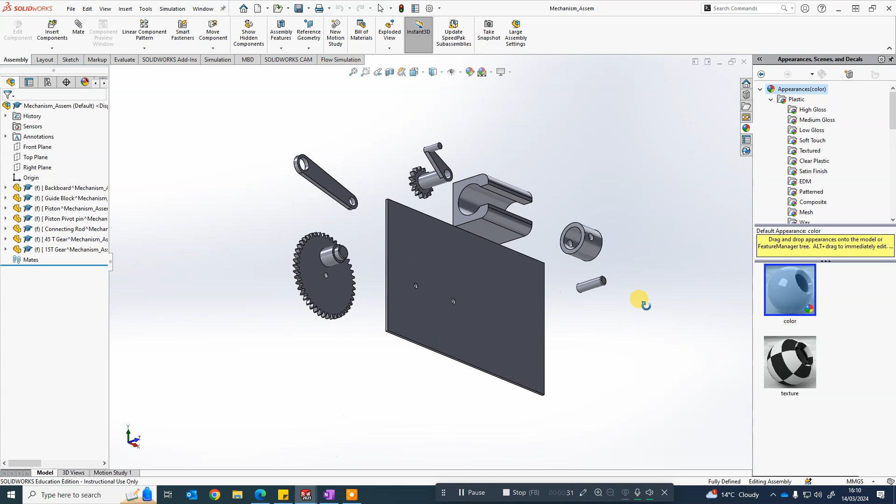So you are going to be assembling this random selection of parts that I've pre-made for you. You'll be modifying some of them as well, and you'll be following a tutorial in order to do that. But the end goal is for you to produce, I'll show you the solution already, this here. You'll notice to prove you did it, I've made you modify the backboard, put your name on it, round the corners, and change the colors.

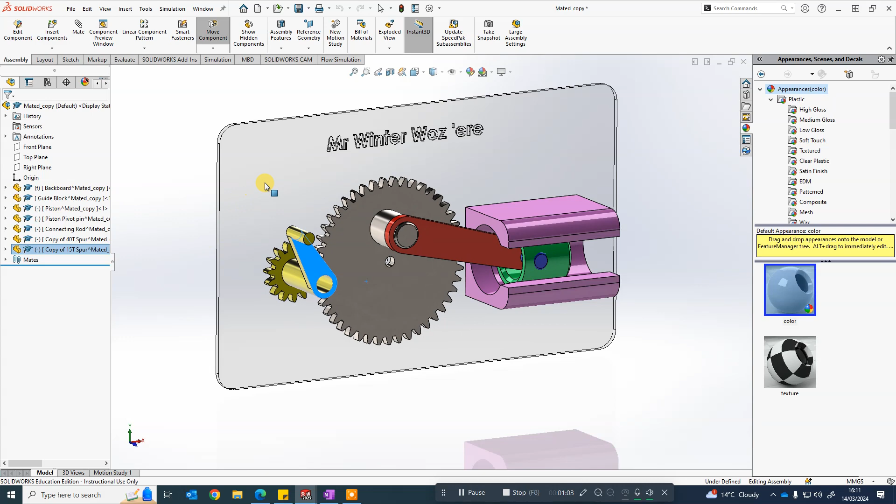But this is where SolidWorks is really cool. You can actually create full-on simulations. So I've made a gear box that drives a crank and slider mechanism that moves a piston back and forth. And I can wind it backwards, and I can interact with this just like I would a real object. So if I push and pull the piston, it moves. That's what you're building up to, and that's what you've got to achieve by the end of this.

Now, very, very important you pay close attention to every step here. There will be places where it's very easy to mess it up if you miss a key instruction. Equally, if something goes wrong and things don't go together as they do in my video, then rewind and watch what I did, and also potentially go back and undo and delete any parts or any mates or constraints that you got wrong.

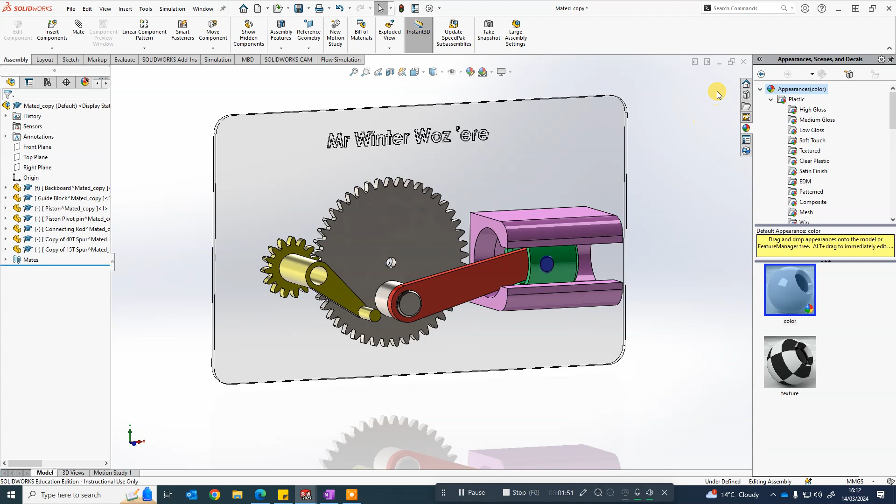Okay, right, in order to begin, you'll go to your OneNote page and your teacher will point you to where this is, but there should be a file for this on the OneNote. Now you can't just open it from here for some reason, OneNote blocks it, so you need to right click, Save As, and then go and save that file in your OneDrive.

Now you should have already signed into OneDrive, remember? So if you haven't signed into OneDrive, come down here, make sure you've clicked on the cloud and that it's signed in. Mine's got a sync issue, but it is at least signed in. And make sure you're on your OneDrive and saving your mechanism assembly here, okay?

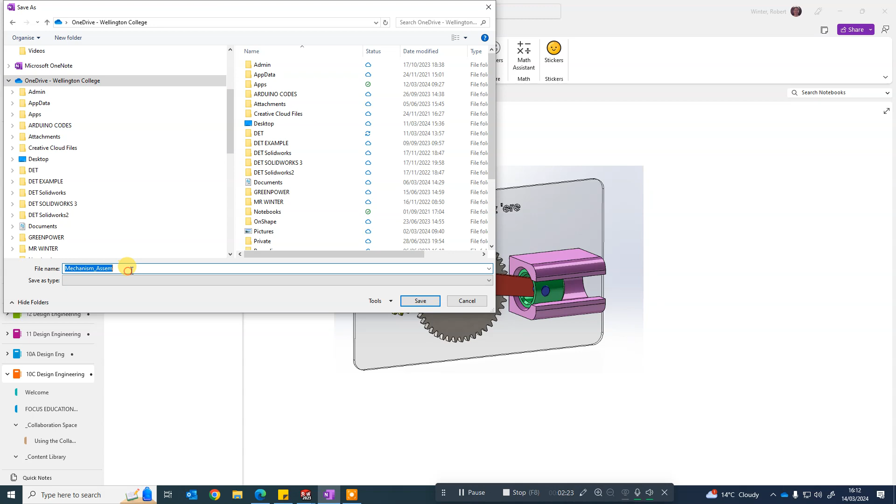I'm going to save this in my OneDrive in DET, and I'm going to call it mechanism assembly. I'm going to call it version 1, just because, you know what, if you make a mistake, do it again. Okay, let's go and open that now.

So I'm just going to close these two down. So file open, and I put it in my OneDrive, DET, mechanism assemb. Now, fingers crossed this works. Here we go. Okay, right.

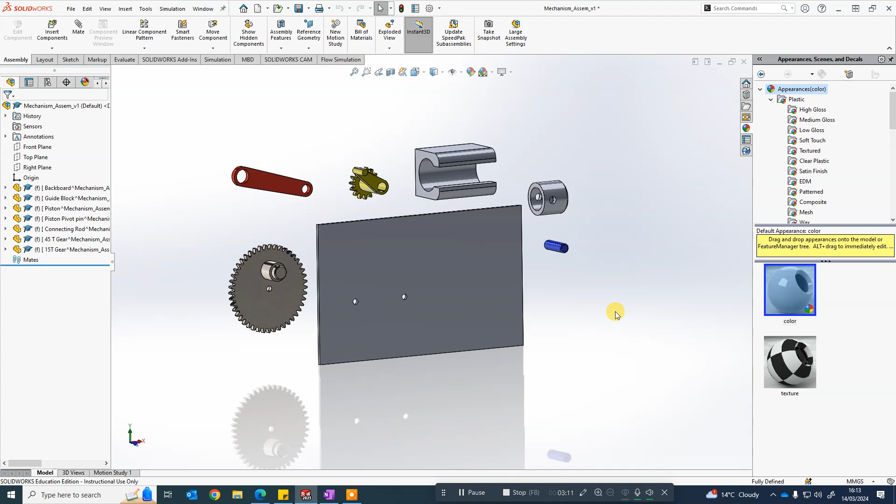So just to remind you, because you're going to need to be navigating your view if you don't know how to do that, it's pretty much done with the middle mouse button. If I click and hold the middle mouse button, I can orbit around. I can zoom in and out by scrolling my wheel. And if I hold control on the keyboard and the middle mouse button, you can see I can drag my view left and right. So just remind yourself how to do that, because in 3D assemblies, we'll be looking all over the place to pick the relevant parts that we need to join together.

Okay, at the moment, if you click and drag or try to drag any of these things, you'll notice you can't do anything with them, right? They stay put. This is the first concept I'm going to introduce. These are all fixed in space at the moment.

And you can tell that because they have this little F symbol next to them. Now, I want you to make everything except the backboard, this grey thing, unfixed.

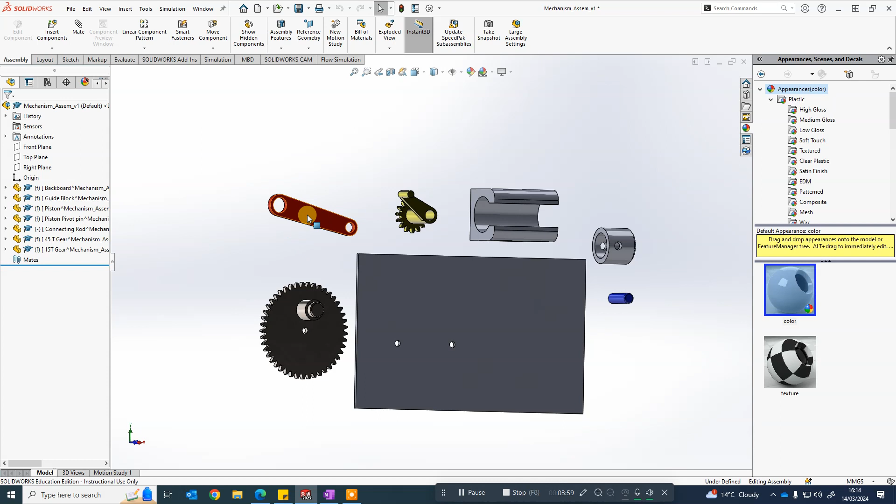We do that by right-clicking on them and choosing float. You'll notice when float is selected, the little F disappears and I can now drag it around. It's very important if you're trying to join 3D things together that you make them float initially, because otherwise they can't move from their location and it will throw up an error. You'll tell it to go and stick to something else and it will go, nope, some random error that I don't understand. Well, you won't understand, but it won't do it because you've left it stuck in space.

So that needs to be floated and that needs to be floated. Right, just check they all move. All good, good, good. Now, I've deliberately designed this to teach you about a whole bunch of different constraints, okay?

Now I keep calling them constraints. I should probably call them mates, because the tool we're using is up here. It's called mate. It's under the assembly tab, so make sure you're on assembly, and it's called mate. Now, if you click it, you'll get this sort of window appear here.

It's a semi-intelligent tool. You don't actually have to choose your mate first. It generally figures it out for you. We're going to start simple. We're going to start by attaching this little gear to the backboard.

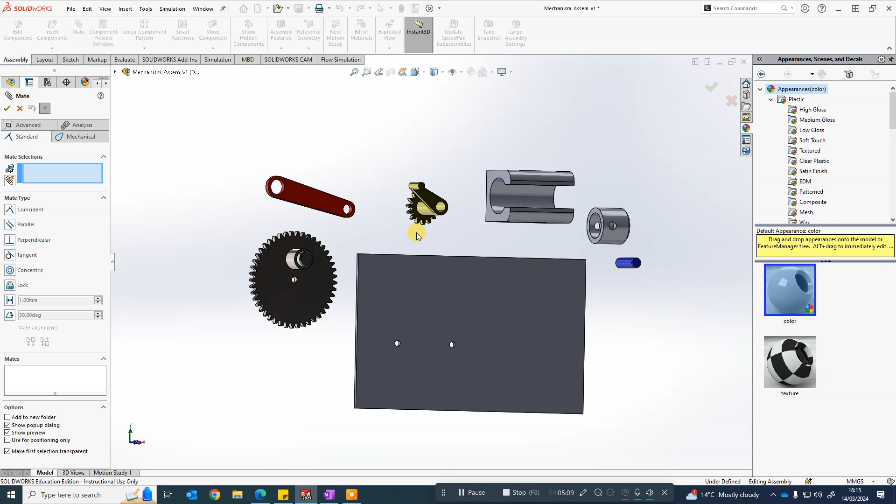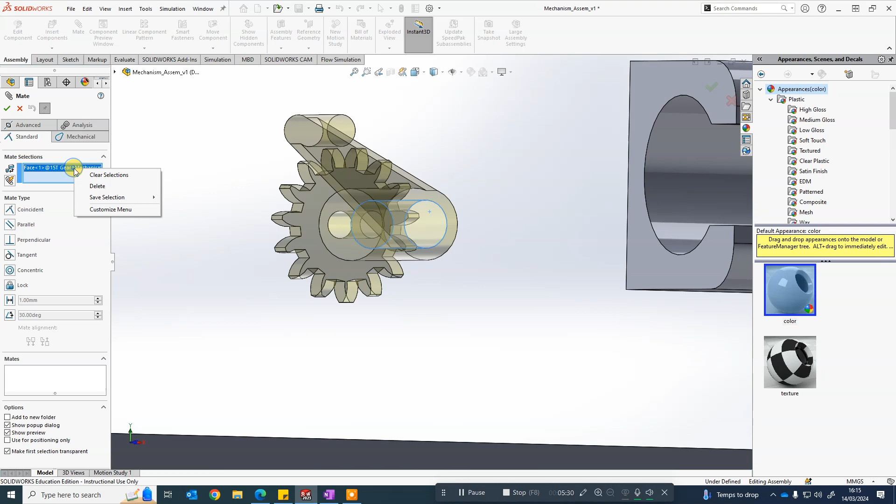So what I'd like you to do, just zoom in, don't click anything, and choose this inside cylinder, not the edge, the cylinder, okay? If I click it, just before we do anything else, do you notice it appears over here? Look, that's telling us what we've selected. If you misclicked, you can always right click over here and either clear everything or delete the one you clicked.

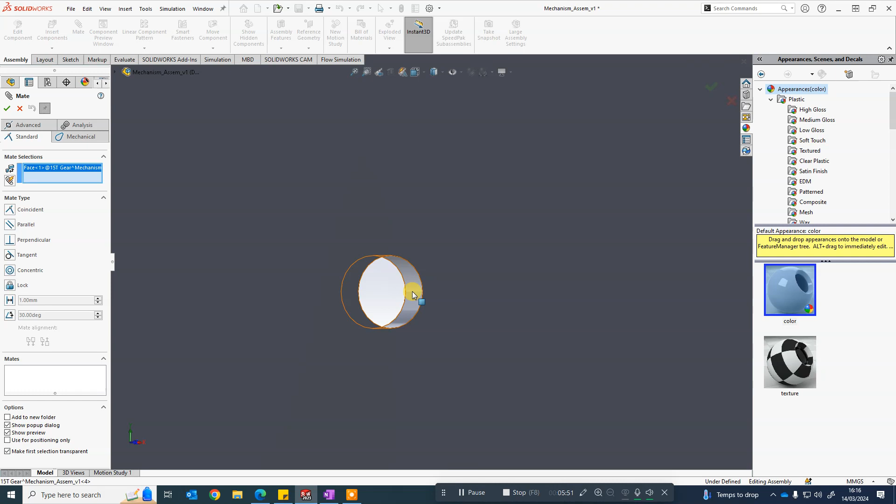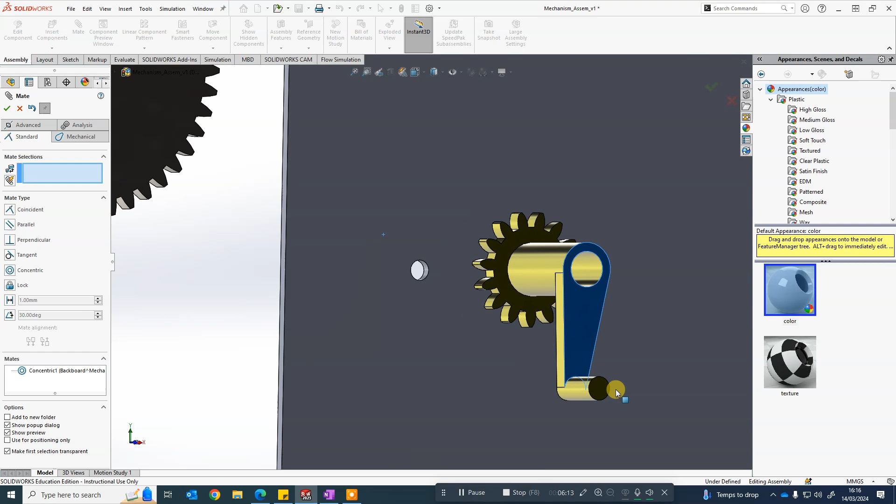Now, just do me a favor and just click and drag at the same time the gear. You'll notice the gear is fixed to the axis, but it can still pass through it. Okay, so drag it out of the way, zoom out, and bring your view around a bit.

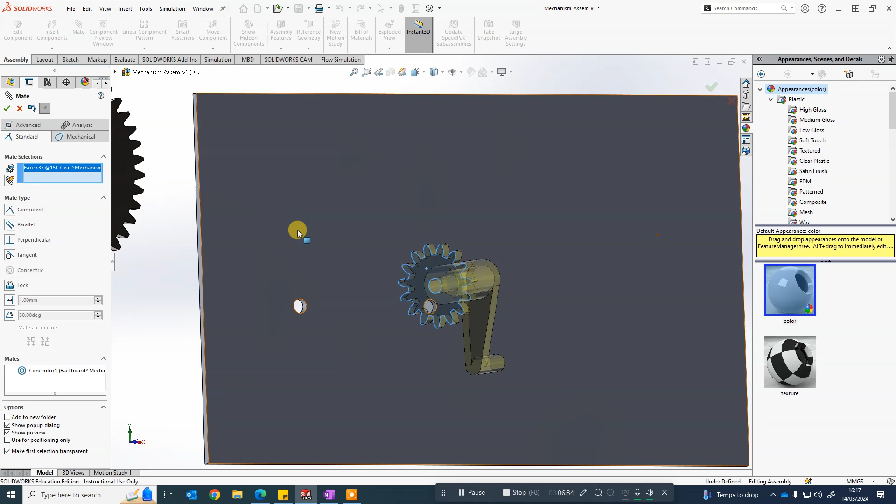Okay, we're going to do our second mate of the day. We're now going to pick this back face, okay? So I'm going to pick that back face, it's this blue outline, okay? I'm going to rotate my view around, and I'm just going to pick the face of the grey backboard. You see what that's done? That's joined the two of them together.

If I click the tick or hit enter, it will confirm it. Now, just to prove that works, click and drag your handle again now. You should be able to rotate your handle, and if you drag it in and out, it won't come off the backboard. It's bonded to the axle and to the backboard.

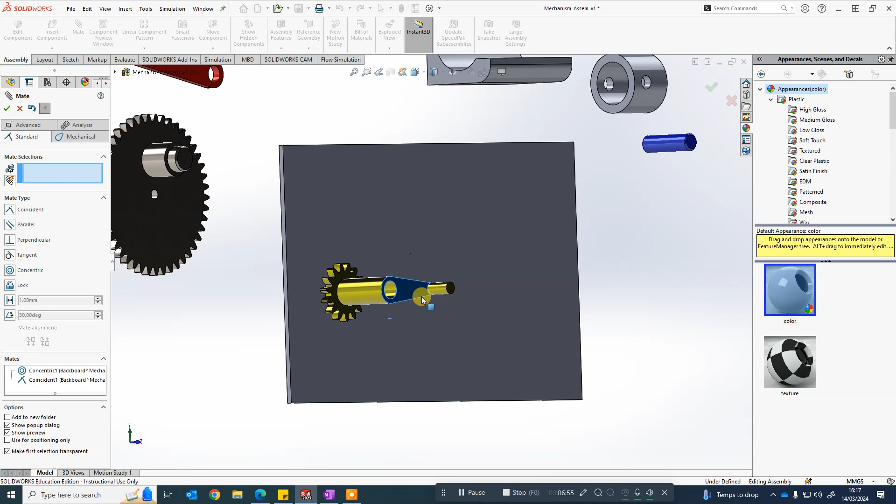So this is what's known as a two degrees of mating, if you like. We don't need to put a third dimension in because we actually want this to spin on the spot. But there are other situations where you might decide that you need to lock a part down.

If you're interested, down here, look, are the mates that you've just done recently. And if you screwed one of them up, you can just double click on it and it will bring it back to the fore. Okay, and you can change things. You could change which of the faces you selected or whatever. Okay, anyway, if you're happy with your mates, click the tick.

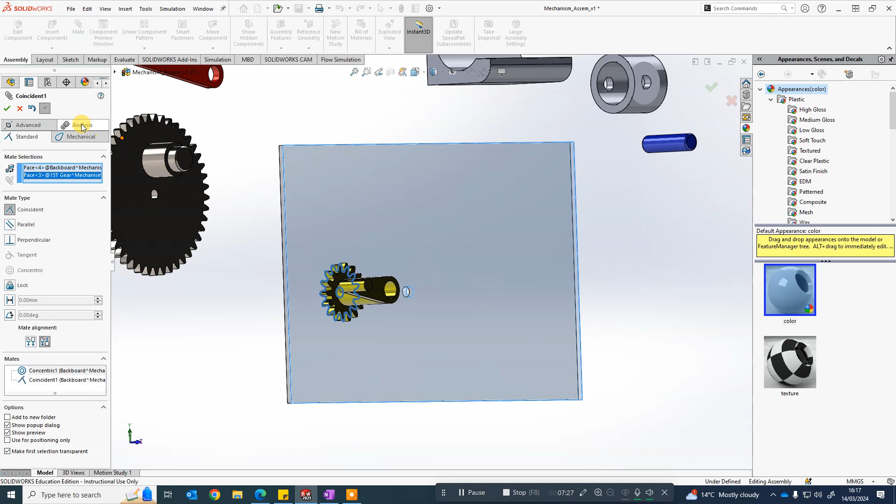Okay, just double check that it's behaving as you want. All good. Right. Now, say you screwed something up, which someone's bound to because they'll select the wrong thing, it will go wrong, okay?

Do not panic. I'm going to show you how to get rid of mates for a part so you can always go back and repeat this step. Say you'd messed something up with this and it was stuck the wrong way around, all right? Don't worry. Click on the part and you'll see that selects it over here in the browser.

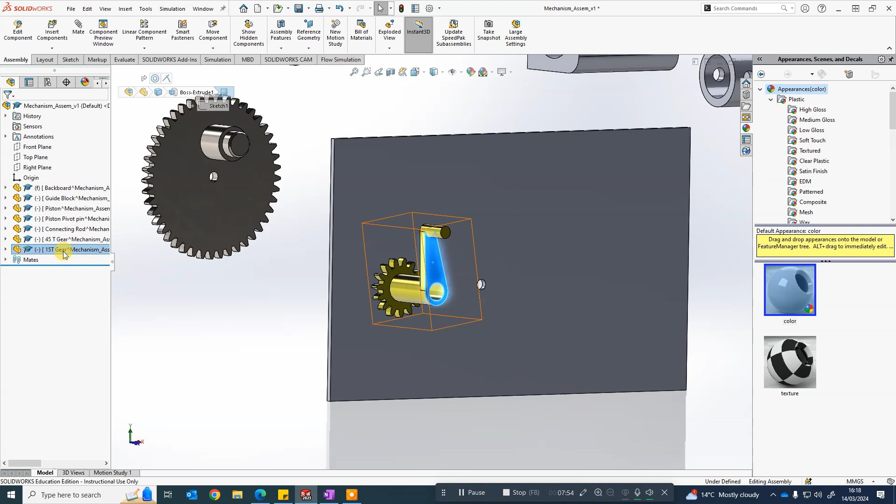Click the little arrow and underneath that part now, can you see there's a folder with mates? If you open the folder, here we go, look, there's our two mates. We made a coincident where we joined the flat bit to the flat bit, and we did a concentric where we did the cylinder and the cylinder. And it even highlights it for you so you know what it's referring to.

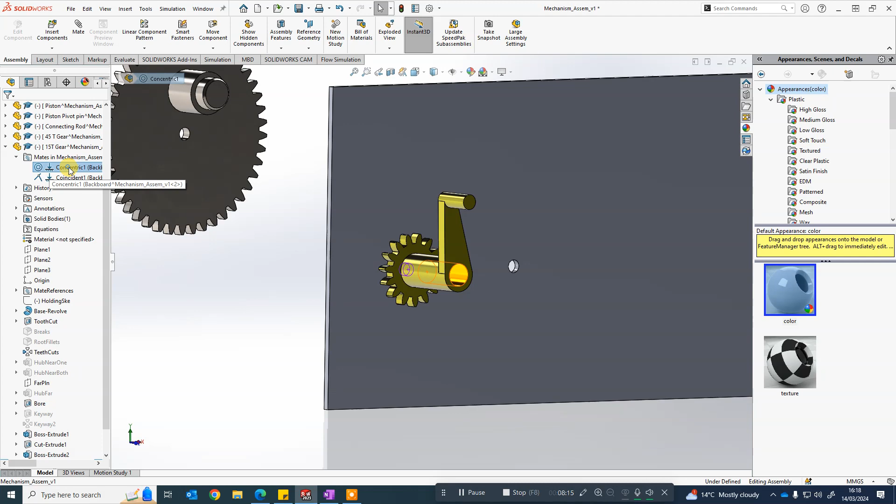So if you wanted to, you could right-click, delete, get rid of them and start afresh, okay? I'm not going to because I'm happy with it and it's correct.

All right, I would like you now, I'm not going to help you, to mate this big fat gear to this hole and this backboard. I'm not going to walk you through this bit, I'm just going to do it.

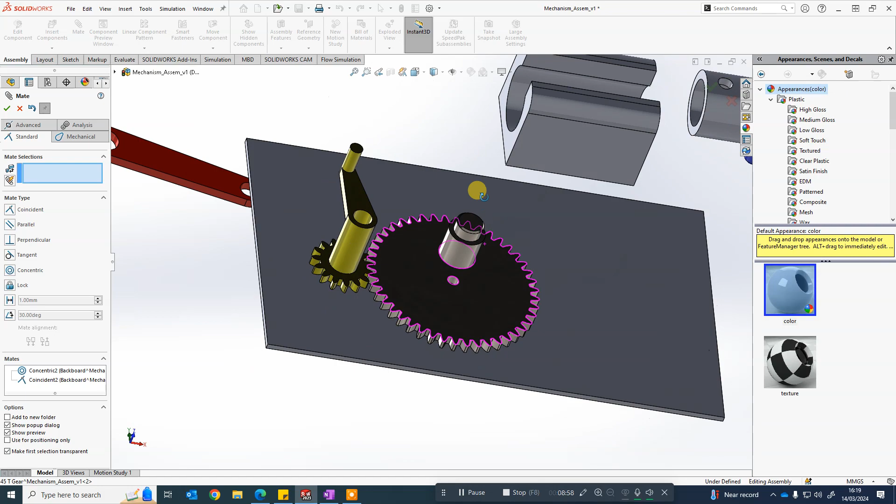Okay, good. So hopefully you succeeded in that. If you didn't, and it's stuck to the backside or it's the wrong way round, I want you to go and fix it. And how are you going to fix it? You're going to go and delete the mates.

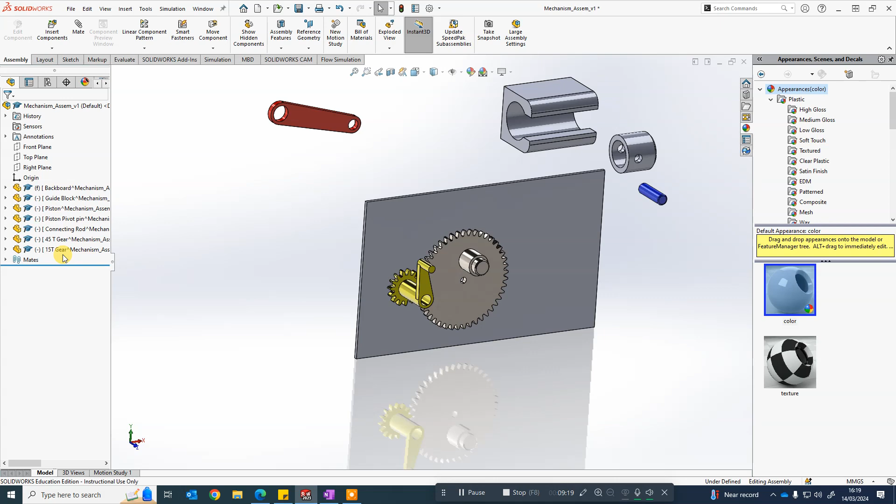Now, I'm going to go and show you, I'm going to go and deliberately make a mess up and show you someone that screwed it up, so you know how to fix it in case you do it. Okay, I'm just going to pause the video and edit this to be messy.

Okay, so this is something you'll see quite common. Clearly, if I grab my gear, it's stuck to it, but somehow I've stuck the wrong face to the wrong side, okay? Or it's orientated the wrong way around, so it's not quite right. So I want to fix that. How do I do it?

Well, we know this has got the problem, so click on this part. Here is this part. Here is its little mates folder. Here are our mates. And we've got to decide which one of these is wrong. Now, if you're really unconfident, you could just delete them and redo them.

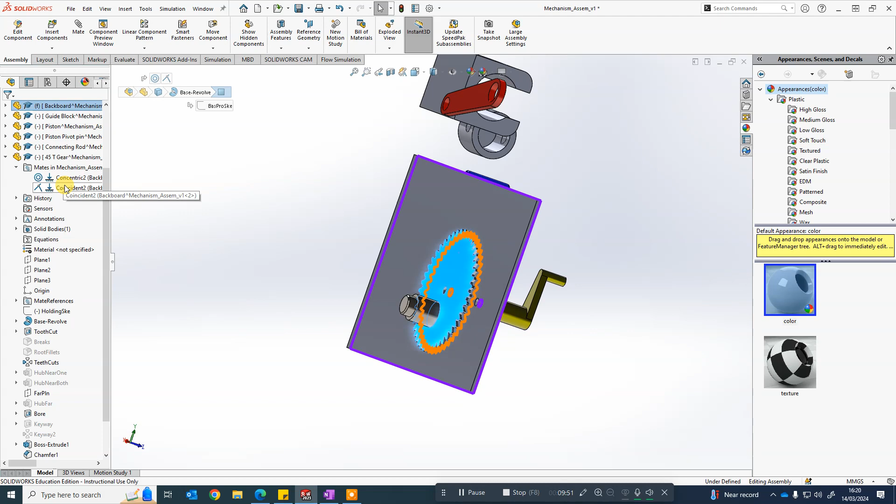Or you can try some things. So I'm going to go to this concentric one, right click it, and I'm going to go edit. That's what this little icon means, edit feature. This will take you back to where you set it up originally, and you might notice you've got these options here, mate alignment, okay? Just try clicking the alternative option if you have done this problem on yours. Did you notice what it did?

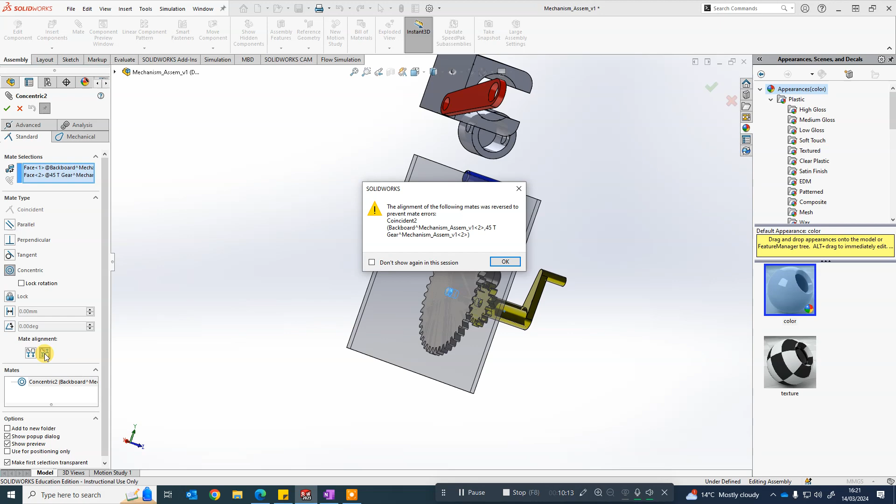Ignore the error. It flipped it round, so it's the opposite way round. If I do that, it flips it back the other way. I know that the configuration I wanted is this later one. I wanted it on this side. So quite often, the reason your mate's gone wrong, it can just be fixed by just flipping the alignment.

Because if you think about it, when you put something on a line, it doesn't know which way you want it facing, whether it's the inside face facing or the outside. It's pot luck. So generally, you would choose those at the start before you hit the tick. But if you do make a mistake, you can always come back, edit it like I just showed you, and do that. Okay, so anyway, we're done with mates.

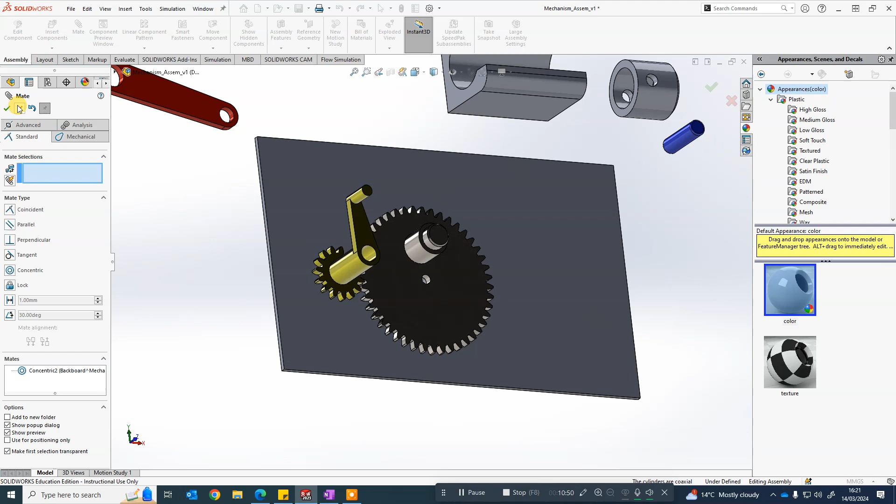Good. Right. Now, this is all very well and good, but this doesn't move that. Now, this is quite a complicated mate. Well, it's not complicated, it's just a little bit more involved. There is no easy way of making that touch this and move it.

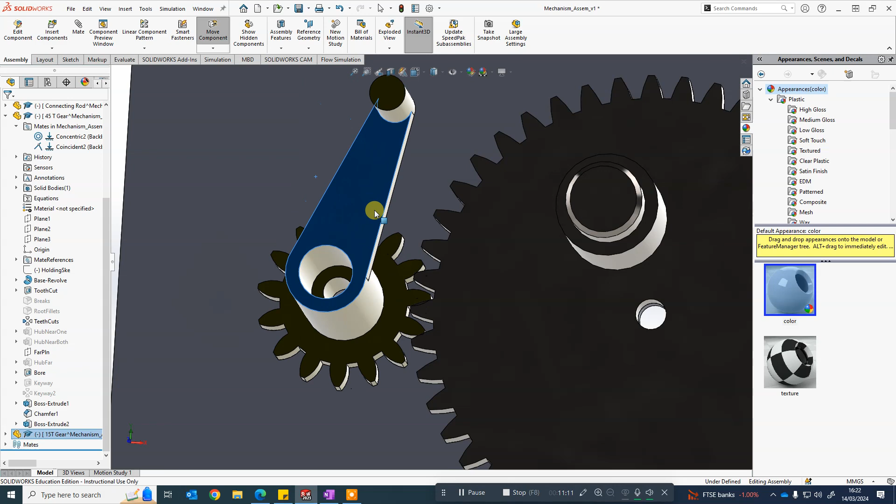It's not that clever - the program doesn't actually understand that those things would physically touch in real life and turn. So all I'd like you to do is just turn either of your gears so that the teeth are meshed, meaning there's space in between them like that, not overlapping. And we're going to go to mates.

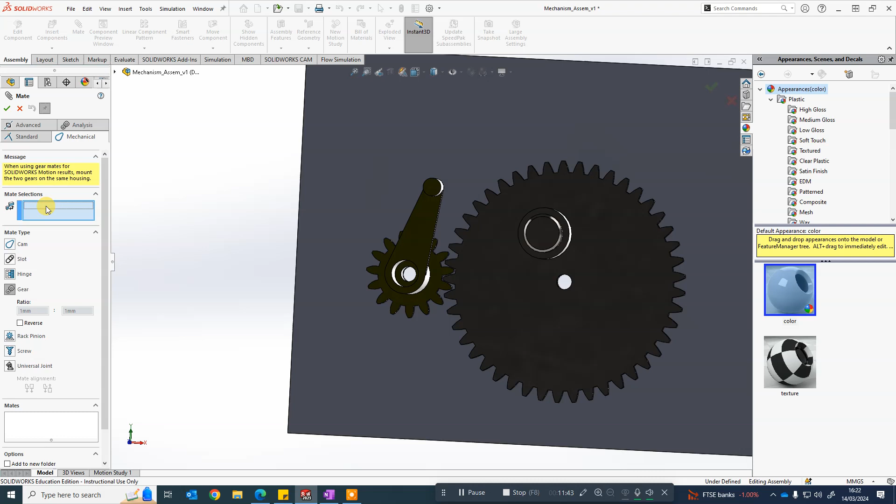Most of the time you use standard mates, but for this one we're going to choose a mechanical one. Click on the mechanical tab and you'll notice there is one for gears. Click gear. Now it's saying mate selections - that's meaning choose the gears, but it doesn't really make this very clear.

You need to choose a round feature of both of the gears in question. It can be anything that's round on either gear - it could be this bit here, it could be that bit there. I wouldn't do this bit because that's not on the same axis as the gear, but it could be this round edge here. I'm just going to pick this one. And I'm going to do the same on this object, picking a round bit that is on the same axle that the gear is.

Now can you see it's got these boxes, teeth diameter, teeth diameter? These are just randomly picked numbers at the moment. Now you wouldn't know this because you didn't draw them, but I drew this gear with 45 teeth on it and this gear with 15 teeth on it, and that's the ratio between them.

15 into 45 goes 3 times, so technically for this to work it would take 3 rotations of this small gear to make this big one turn once. That doesn't really matter - all you need to do in these boxes is type in the relative ratio. So I know 15, I'm going to type on the left one.

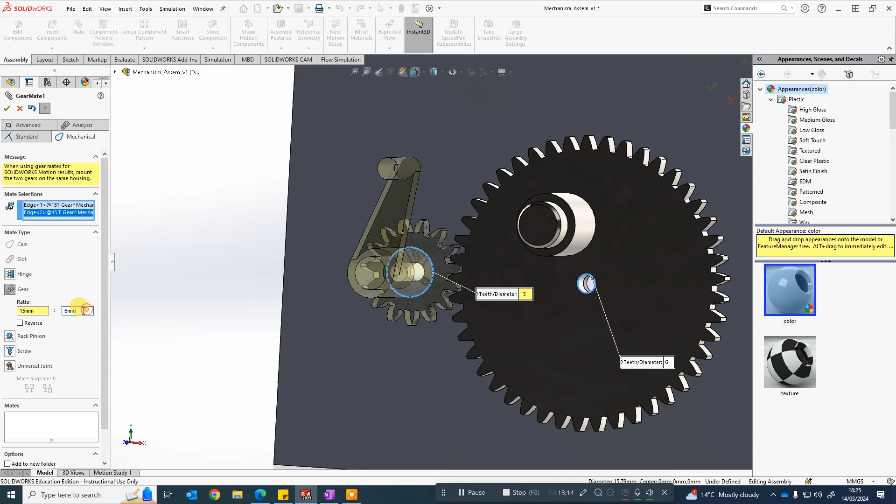So I'm going to type 15 in that box, and I know this one had 45 teeth, so I'm going to type 45 in that box. I'm going to click the tick just to lock it in. And now, all being well, if I turn this, you should notice the teeth mesh perfectly.

Now if you got that ratio wrong and typed a different number, the teeth wouldn't line up - they would start overlapping, okay? But because it's exactly 15 to 45, we get this lovely rotating mate. Isn't that cool? Okay, good, good.

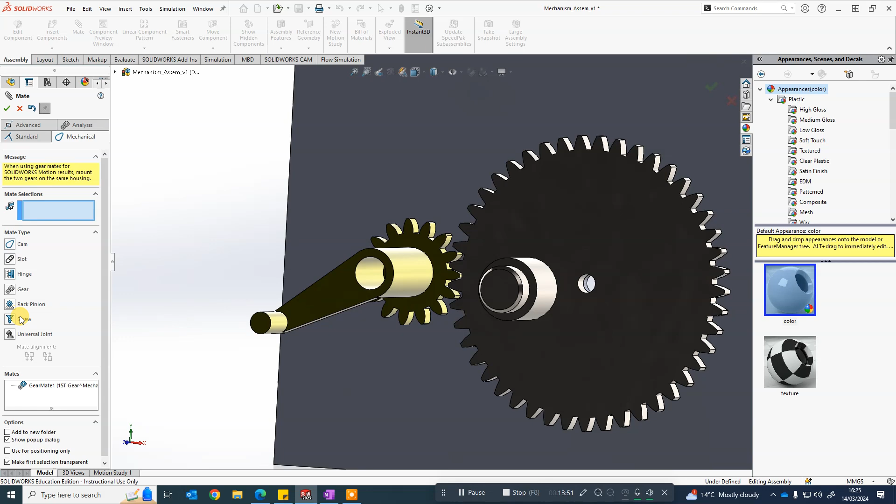It's happened because you need to reverse the direction. So I'm going to tick reverse to show you the wrong way so that you can then see what I'm talking about. Can you see the problem here? They're both rotating in the same direction, but clearly that's not what would happen in real life.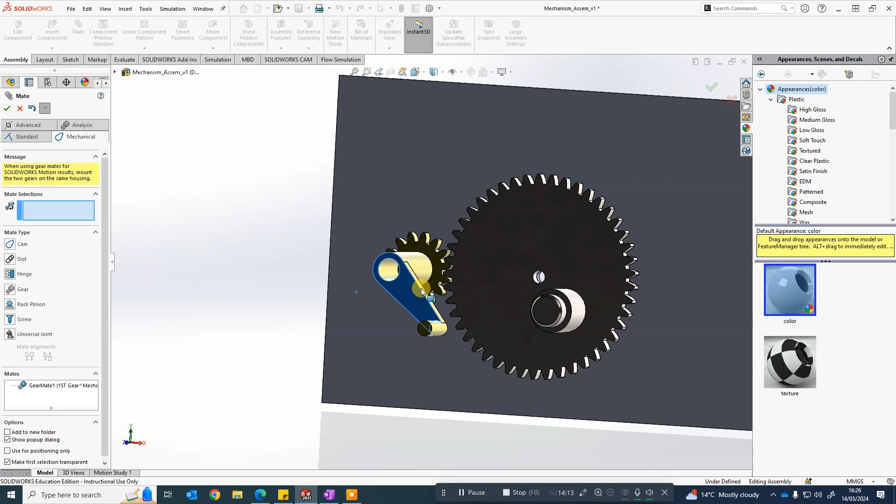All right, we need to reverse the movement. So if yours does that, go in, double click your gear, either tick or untick reverse depending what's needed, and click the tick until it behaves as it should.